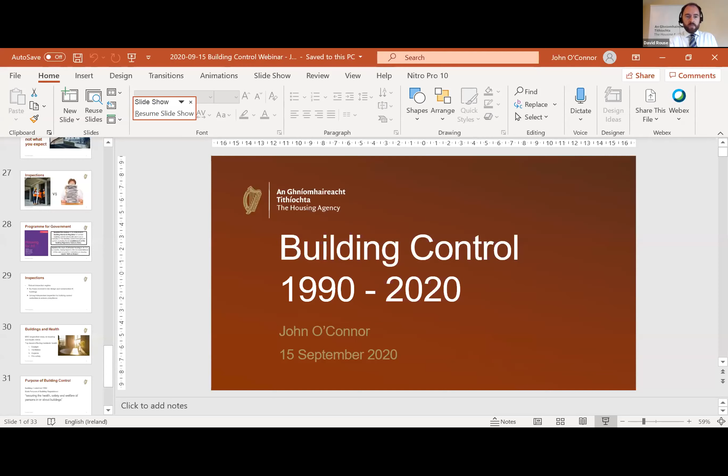Thanks very much, David, and good afternoon, everyone. I'm glad to be speaking on this topic. We're 30 years on from the Building Control Act in 1990.

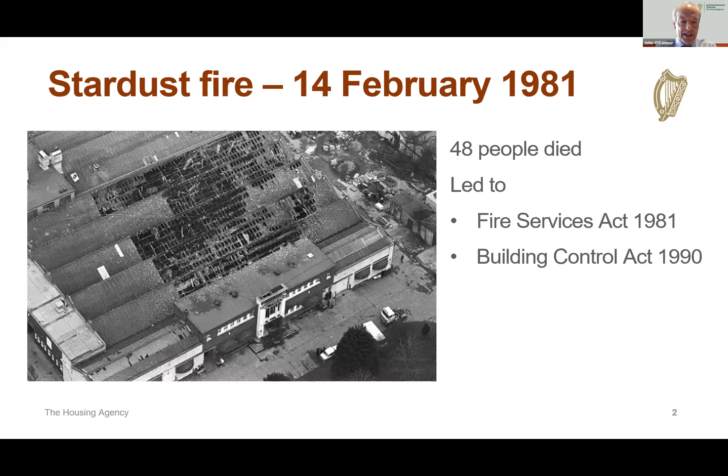Just by way of background, you'd all be familiar with the tragic Stardust fire on the 14th of February 1981, Valentine's Day. Tragically, 48 people died in that fire, and that led to the Fire Services Act in 1981, and then on to the Building Control Act in 1990.

The Building Control Act in 1990 — the minister at the time who brought it in was Pádraig Flynn from Mayo, and it was also the year of Italia 90. I gave my first public lecture on the Building Control Act on the 14th of June 1990, in the middle of Italia 90, and surprisingly 300 people turned up at the time, but it was an important area in terms of the introduction of a different form of building control in the country.

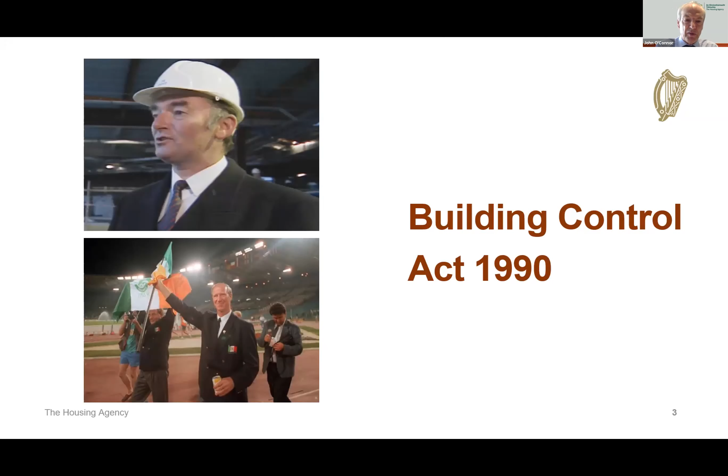A number of issues in relation to the Act in 1990 that I think we should all be reminded of: firstly, the legislation is enabling legislation, and it's under the Building Control Act that building control regulations and building regulations are made. But there's a number of very specific items in the Act that are important.

One, in terms of the responsibility for compliance, rests with building owners, builders and designers. Section 3.5 in particular states every building to which building regulations apply shall be designed and constructed in accordance with the provisions of such regulations. So it's very important that we're all aware of that.

The Act also gives powers of inspection, by authorised persons. These would be authorised by the building control authorities — the local authorities — or the minister, to carry out inspections or to request information. That's Section 11 of the Act. And offences and penalties are covered in the Act, Sections 16 and 17.

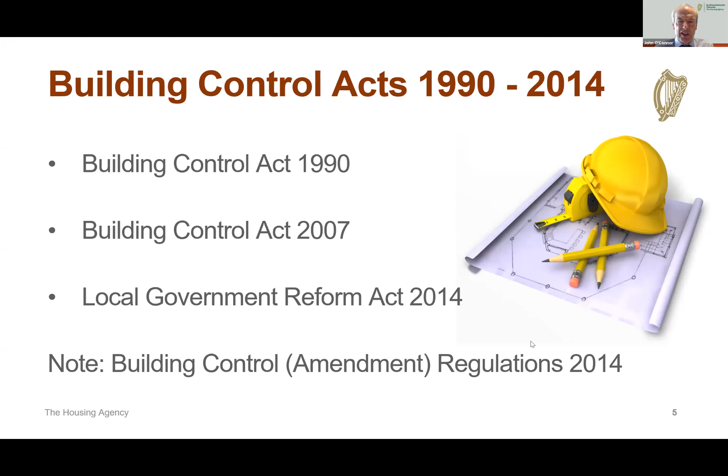The Building Control Act of 1990 is still very much the most important piece of legislation from building control's perspective. There was a significant act in 2007 that made some changes to the Primary Act, and it introduced provision for disability access certificates. Then there was an act in 2014 that made some further amendments. But one of the biggest changes since 1990 happened in 2014 with the Building Control Amendment regulations, which brought in significant additional requirements in relation to the building control system.

And then there's two very important sets of regulations: the building regulations and the building control regulations. It's important to note that the system could operate purely with the Building Control Act and the building regulations. But the building control regulations bring additional measures to ensure compliance.

The building regulations set out the technical requirements for compliance with any building work. It's very important for anyone involved in building control to be aware of the regulations and what applies depending on the type of work being carried out. Underneath the building regulations, we have the technical guidance documents, which provide guidance in relation to compliance with the building regulations, and they vary from Part A, structure, down to Part M, access. So it's very important to realize that the building regulations are the primary document.

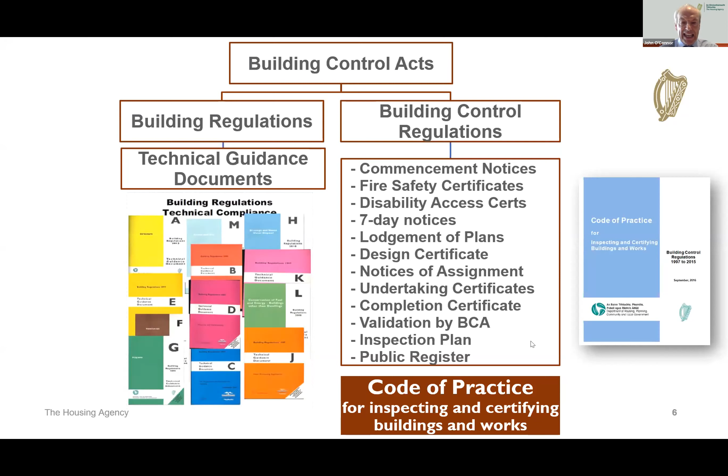There was also a statutory code of practice for inspecting and certifying of buildings and works. I was involved in the drafting of that code, along with a representative group from the industry and the department, in relation to the certification system that was included in the amended building control regulations at that time.

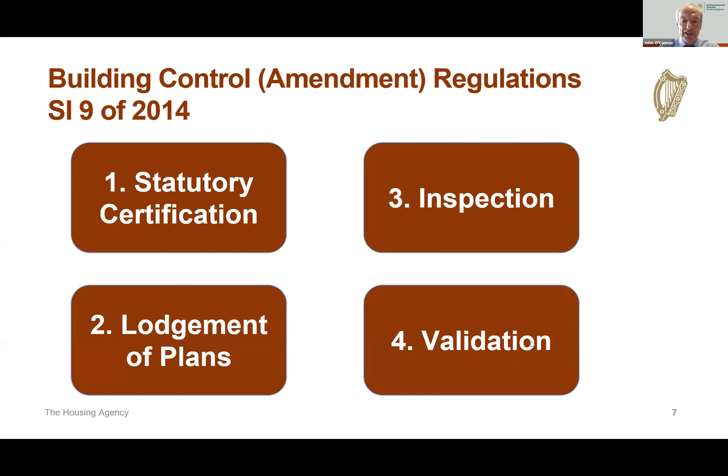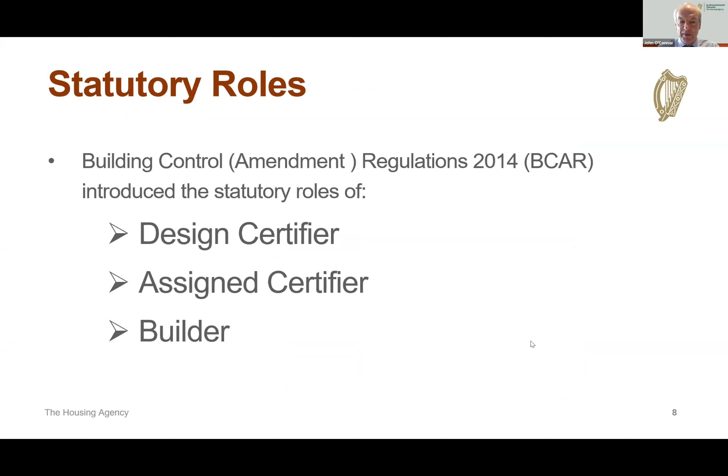The Building Control Amendment Regulations of 2014, known as BCAR, introduced four additional specific measures: statutory certification was introduced, the lodgement of plans was introduced, an inspection regime for during construction, and a validation process for building control authorities at commencement and completion stage.

Also, statutory roles were introduced: the design certifier, the assigned certifier, and the builder. I'm not going to go through all the details, but there are certain obligations on the building owners, and they're set out there, and these slides will be shared with you.

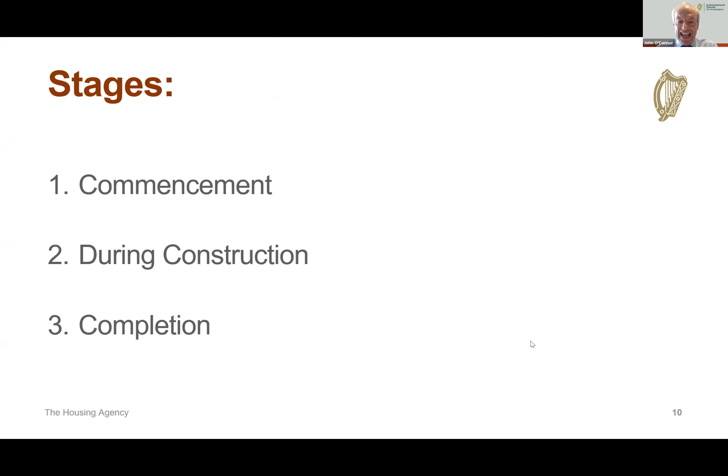In terms of building control, maybe there are three stages that are particularly important: commencement, during construction, and completion stage. So if we look at the commencement stage, first of all...

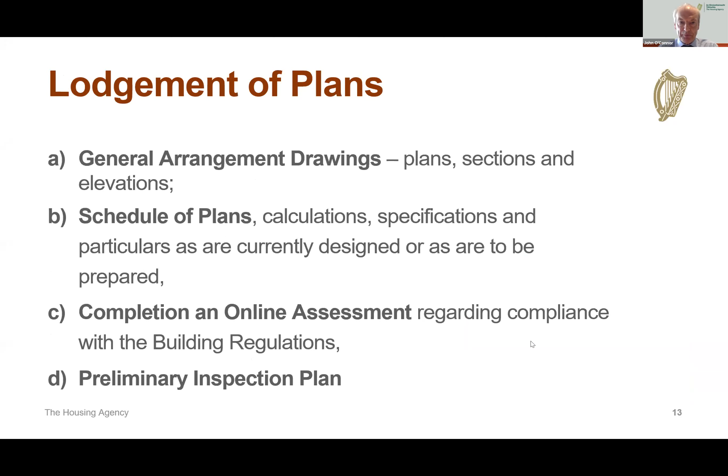The commencement notice has always had to be lodged, but there are now additional requirements in relation to the commencement notice that is submitted. There is now a requirement, since 2014, to lodge plans with the commencement notice, and to lodge a preliminary inspection plan with that commencement notice. There is a requirement to lodge a design certificate with the commencement notice.

Now, Richard will be talking later. All of this lodgement is lodged with the Building Control Management System, a national system that Richard will speak about.

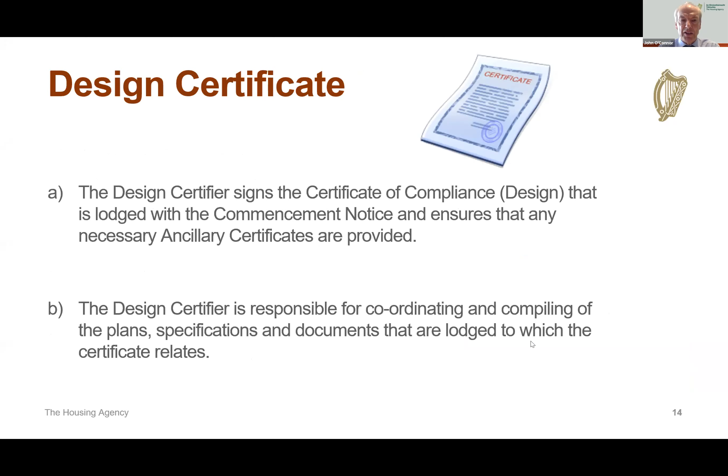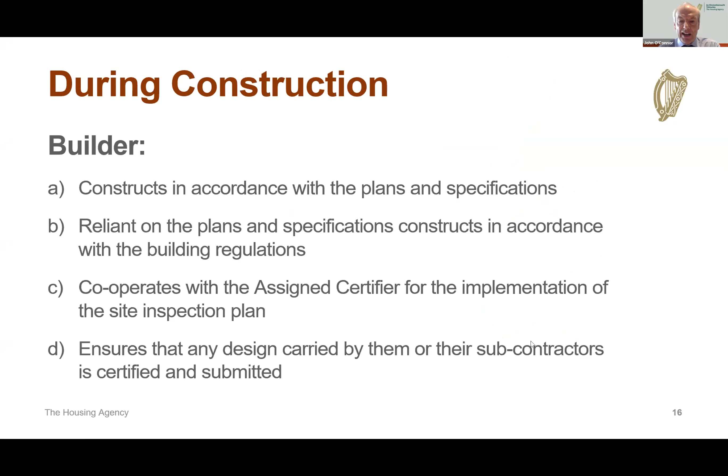Then there's the construction stage. At the construction stage, there are requirements on the builder to construct in accordance with the plans and specifications, and generally in accordance with the building regulations. There are requirements on the assigned certifier, who prepares and implements the inspection plan and coordinates what's happening during construction.

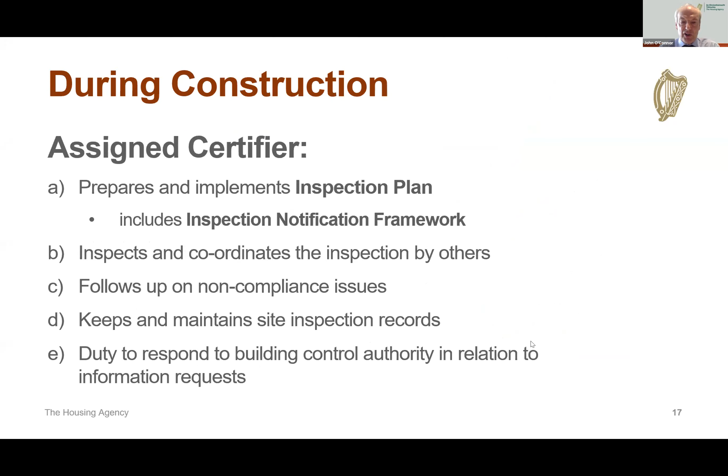Inspection is a critical element of the 2014 amended regulations. The assigned certifier and others carry out inspections, there's an inspection plan, and there's a record of those inspections.

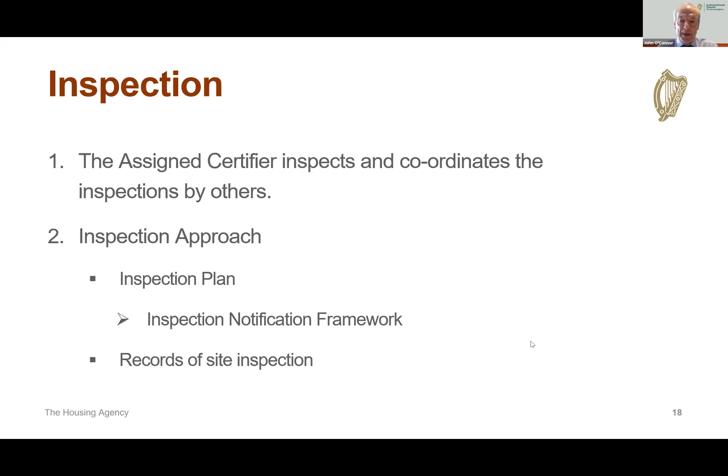Then we move on to completion stage. At completion stage, again, there are documents that have to be submitted, online to the Building Control Management System: a certificate of compliance and completion, plans, and if there are changes to the plans, and the inspection plan that was implemented.

There's a completion certificate. This is the most important certificate required in the building control system, signed by the builder and by the assigned certifier, and supported by ancillary certificates.

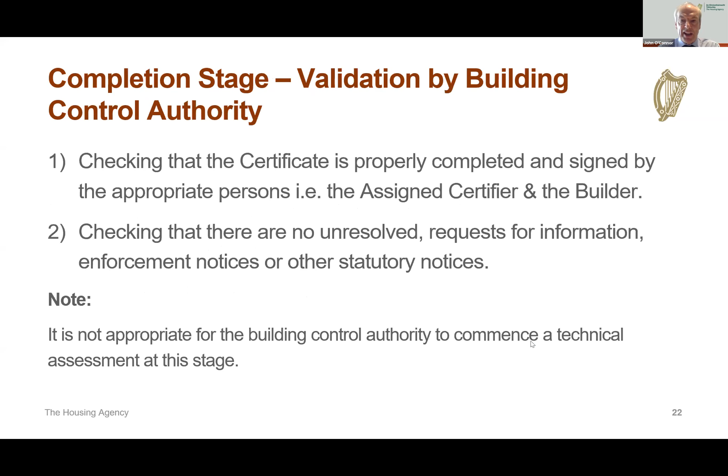Also at the completion stage, there's a validation process by the Building Control Authority to ensure everything is in order. There are timeframes and methods in terms of dealing with the validation process. Very importantly, the certificate must be submitted, validated, and placed in a register before the building can be used.

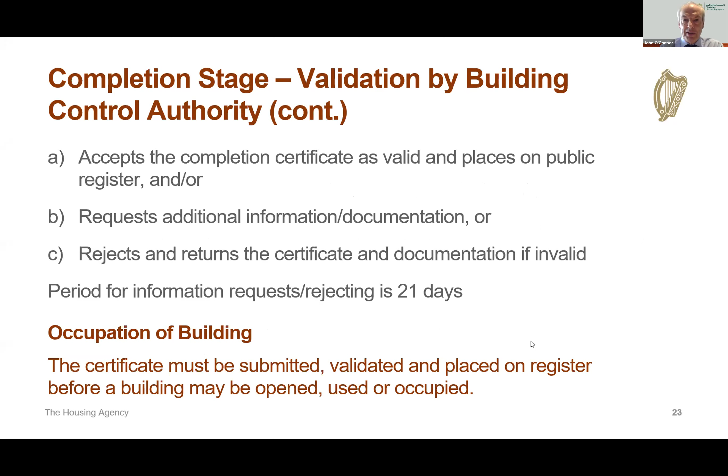In terms of building control and building regulations, it's often the result of tragedies such as Stardust or significant problems. This is Priory Hall, a lot of construction issues and non-compliance with building regulations involved.

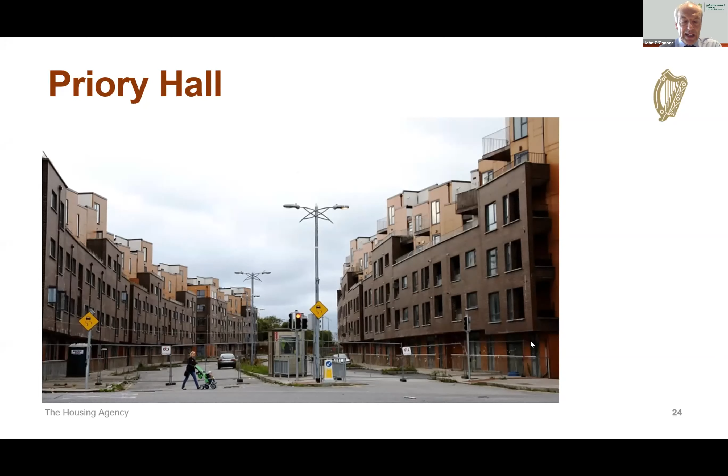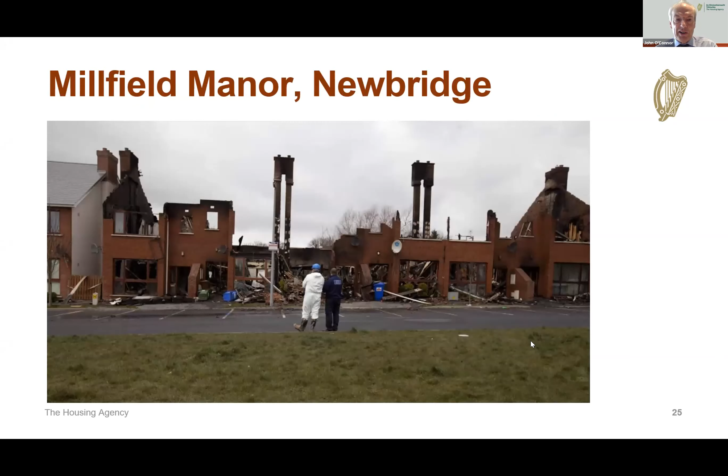And we've had a lot of issues, particularly with multi-unit developments and the defects in them. Even with houses, here's one in Newbridge in Kildare, where a terrace of houses burnt down as a result of a fire starting in one house and then lack of fire stopping at roof level, and fire spread.

A couple of things I want to talk about in particular is the importance of inspection. This is a phrase I always like, and it applies across the board to lots of different areas: you get what you inspect, not what you expect. So inspection is critically important.

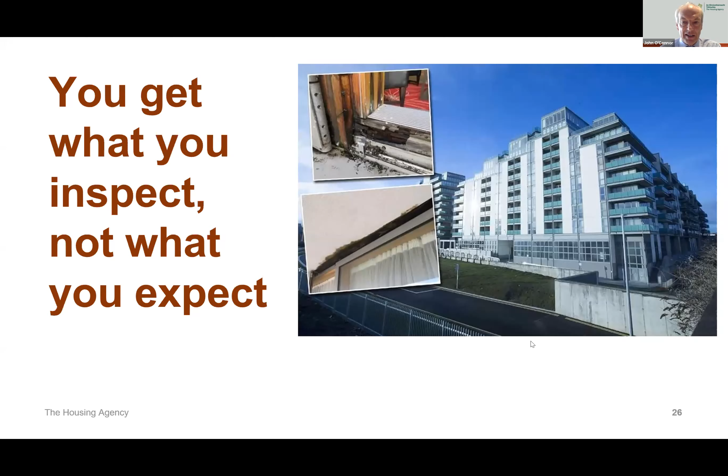I was involved with the industry and with the department in relation to the regulations, and the code of practice came out in 2014. A major part of it is to do with inspecting building works and ensuring that works are built correctly in the first instance.

One particular concern I have, both on the design and assigned certifier side and builder side, and also maybe within building control authorities, is we can get very caught up in paperwork and bureaucracy and making sure all the forms are filled out and everything is in place. But inspection is critically important.

So I just ask all of you to think about how much time you spend on the inspecting side as opposed to the paperwork side. The balance has to be, and should be, on the inspection side - there can be just too much focus on the paperwork.

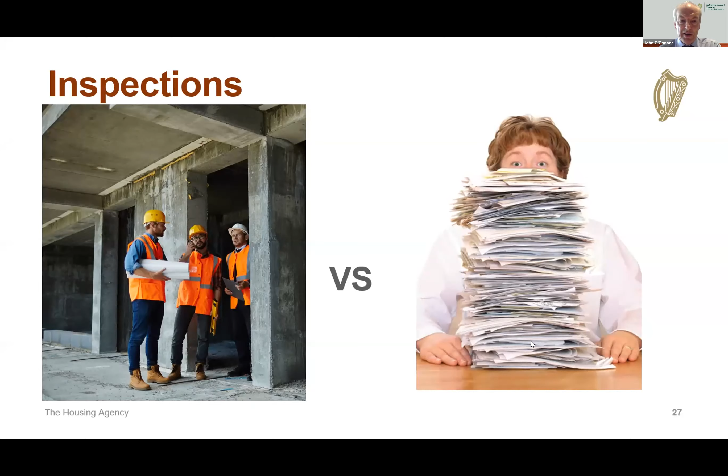In the Programme for Government, there's a lot of attention on the building control system and the issues in terms of defective housing in particular. In relation to building control, there's talk about having a building standards regulator in place, and the re-establishment of the Building Regulations Advisory Body, which is provided for in the 1990 Act, and also then to address issues in relation to defective housing, as were brought up in the Safe as Houses report from the Joint Oireachtas Committee on Housing.

I just want to give my own view on where we need to improve the system, and it goes back to the whole area of inspection. Those involved in design and construction need robust inspection systems. Building control authorities, who provide that independent inspection regime, should strengthen that further. I'd advocate strongly for building control authorities coming together regionally or nationally to put in inspectorate teams focused on specific areas such as residential buildings, houses and apartments, with boots on the ground doing inspections to ensure a high level of compliance. So inspection would be high on my agenda for any changes to the system.

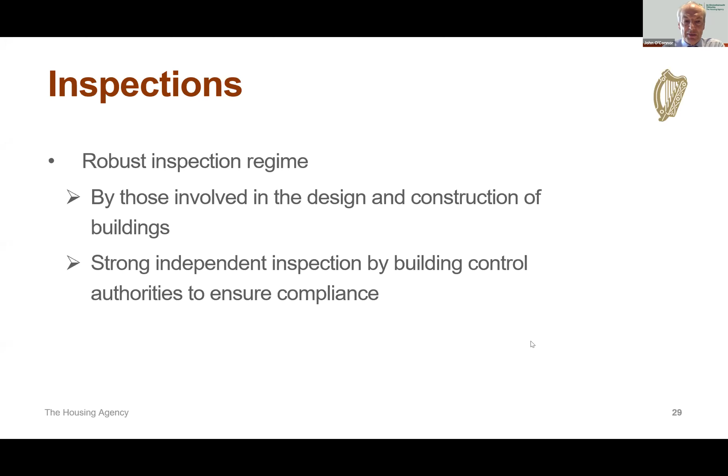I just want to bring it back to two remaining slides, buildings and health. The BRE, the Building Research Establishment, carried out a longitudinal study on housing and health that finished in the 1980s. This looked at houses and apartments over a long period of time, tracking occupants in terms of serious illness and death or fatalities. The top issues affecting health - serious health issues or death - daylight was the most important one they found, followed by ventilation, then hygiene and fire safety. There were others as well, but these were the top four. You might be surprised to see that fire safety came in at number four.

Daylighting was found to be so important because poor daylighting caused serious mental illness or additional mental illness, and the level of suicide in properties with poor daylighting was higher than in ones with better daylighting. It's one area where there are no requirements in the building regulations regarding daylighting, however it's normally covered through the planning system.

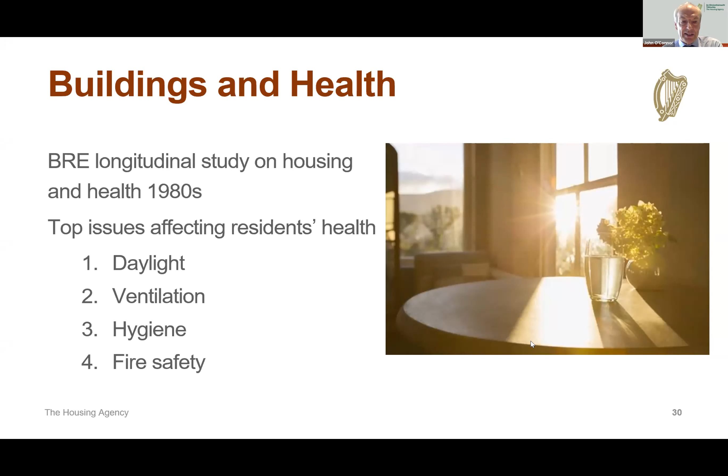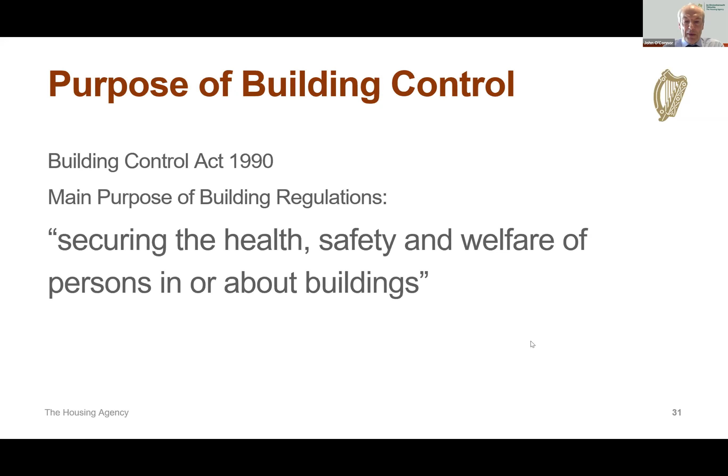Going back to the 1990 Act, the main purpose of building regulations - there are other purposes - but the main purpose is securing the health, safety and welfare of persons in or about buildings. I think we should all just remember that. It's about health, safety and welfare of people in buildings, and that's the whole purpose of building regulation, the primary purpose. There are other purposes such as energy conservation and other matters, but health and safety are the primary matters. So that's a very quick run through from 1990 up to today. I'll hand you back to David.

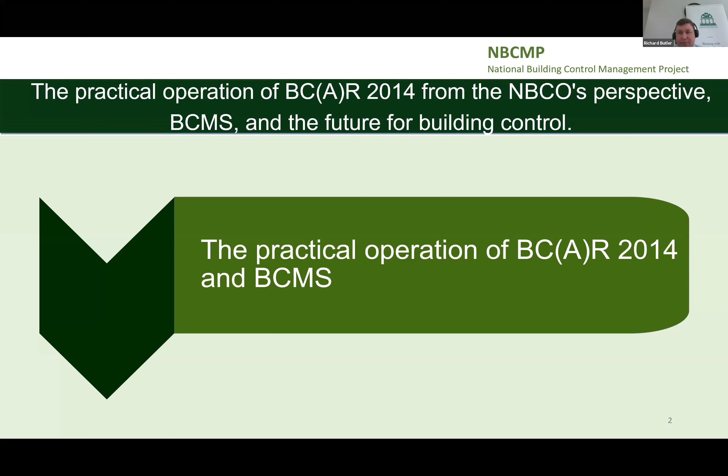The practical operations of BCAR 2014 from the NBCO's perspective and the BCMS. The object of the National Building Control Management Project is to promote a culture of compliance with the building regulations through reforming and strengthening the building control system and inspection regime, developing and implementing standardized approaches and common protocols, and better supporting and further developing the BCMS system.

The National Building Control Management Project provides strategic oversight, support and direction for the development, standardization and implementation of building control as an effective shared service in the 31 building control authorities. We implement BCAR 2014 through our 4 pillars: training, compliance and support, building control management system (BCMS), and inspections.

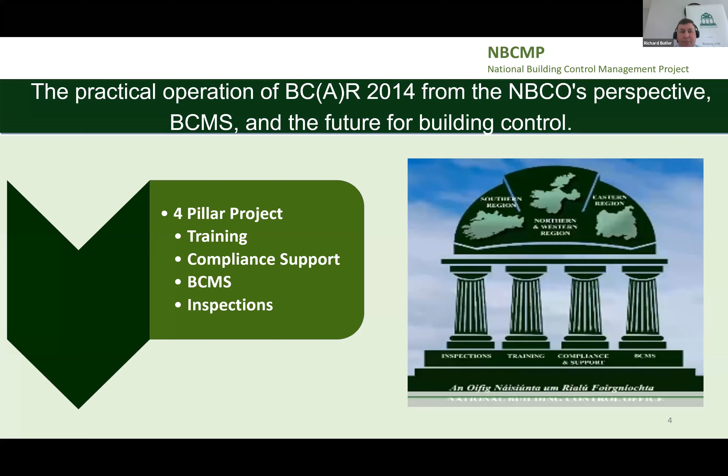The 31 building control authorities are divided into 3 regions: Eastern and Midland region, Northern and Western region, and Southern region. The NBCO and the Department of Housing, Local Government and Heritage meet regularly. This has become an effective way of agreeing and implementing standardizing processes, systems and structures in building control authorities.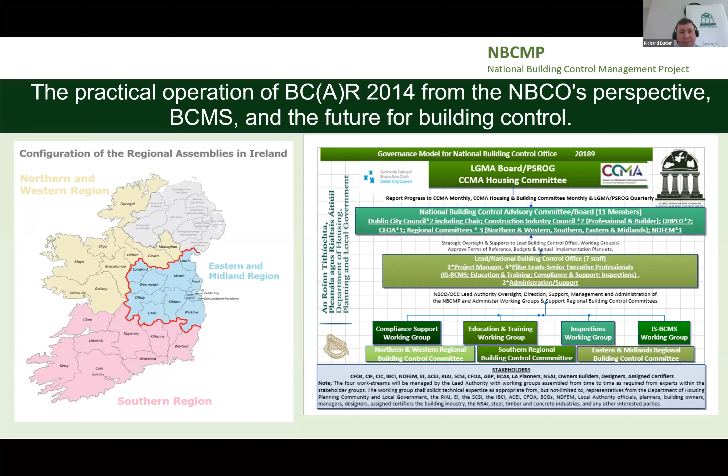Pillar 1, training. The National Building Control Office, in association with Institute of Technology Carlow, runs a certificate in building control management course, recognised as the minimum standard in building control. The first cohort of students has completed the course, and the course will recommence in October 2020. It will be delivered using IT Carlow's virtual learning environment due to COVID-19 restrictions.

Pillar 2, compliance support. The compliance support pillar of the NBCO provides information, advice, oversight, and other support to building control staff and the public in relation to the area of building control. The NBCO provides guidance documents, good practice guidelines, and publishes a quarterly newsletter. We also make YouTube help videos, all of which can be found on localgov.ie webpage. You can follow us on Twitter at NBCO Ireland for updates.

A framework document for building control authorities was produced to standardise work practices, systems, procedures and decision-making in relation to oversight of building control activities across all building control authorities. The framework document outlines the role of building control authorities. It is available to download on the localgov.ie webpage.

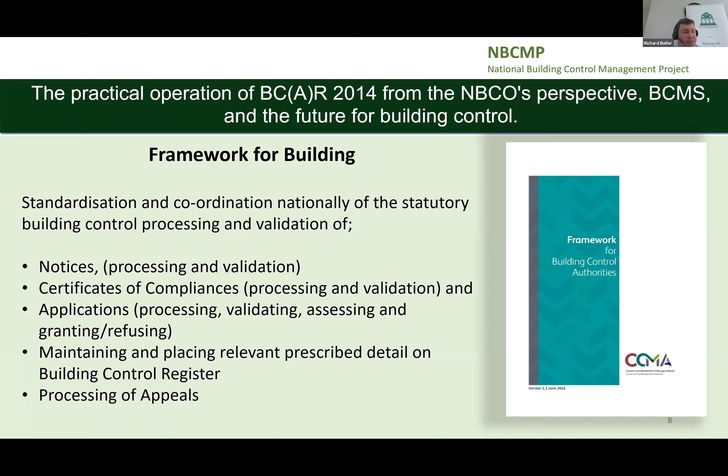The BCMS system allows for the following online submissions: commencement notice types, certificates of compliance for completed buildings or works, and since July of this year, online submission of fire safety certs, disability access certs, certificates, relaxations. We now have a full suite of building control notices on the BCMS system.

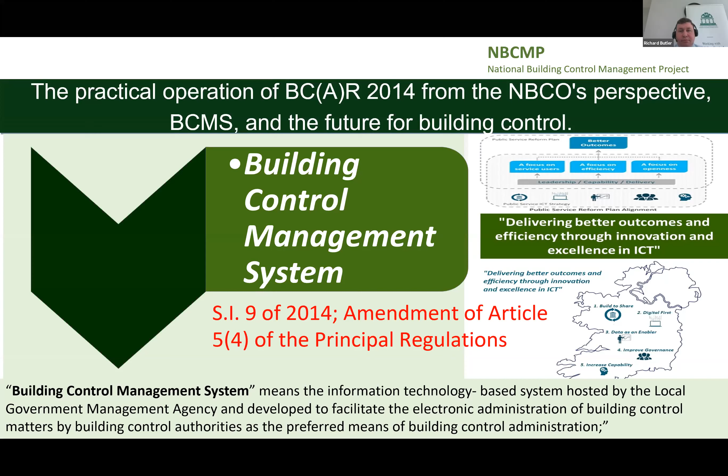Statutory Building Control Register. The BCMS also provides a building control register of notices and certificates of compliance on completion in accordance with Data Protection Act 1988 and 2003. The register contains information such as commencement notice numbers, locations, project descriptions, etc. The register allows for online search by the public. In order to download or print a copy of an individual notice, users need to be logged into the BCMS system.

Pillar 4, inspections. The 31 building control authorities are designated as building control authorities under the Building Control Acts 1990 to 2014 as amended. Building control authorities have strong powers in inspection and enforcement under the Act. Section 8 provides for enforcement, section 11 appointment of building control officers and power of inspections for compliance with regulations.

The NBCO has designed an inspection performance framework to help building control authorities continue to improve their work in promoting a culture of compliance with building regulations. Information on inspections and enforcement activities is provided by the Building Control Authority, which informs results of assessments made through the framework.

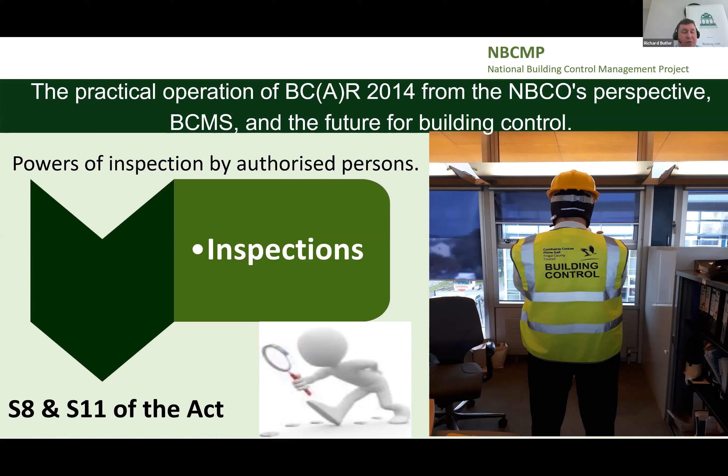Building control authorities and authorised officers' duties include enforcing compliance with building control regulations and building regulations, scrutinising building proposals, validating notices, certificates and applications, assessing and granting applications, inspecting work or buildings and requesting compliance information, serving enforcement notices, legal proceedings for breach of regulations, and maintaining the statutory public building register. Building control authorities also have a function under the Construction Products Regulations and the European Union Energy Performance of Buildings Directive.

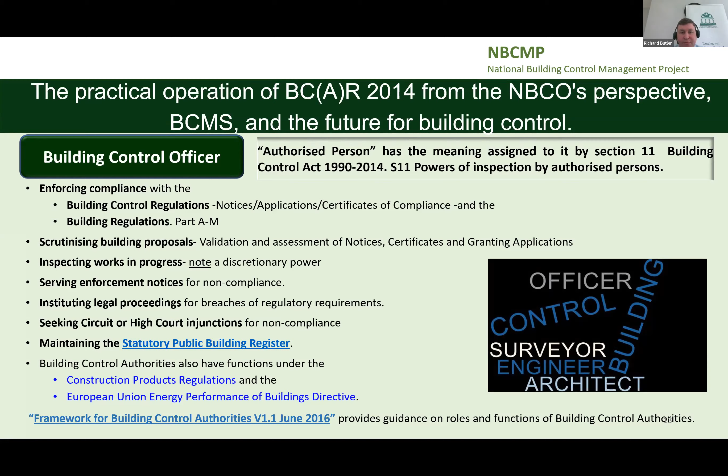Regulatory oversight is necessary to ensure that any failure of regulation among the agencies involved, be they the homeowner, the designer, builders, etc., is detected and remediated in an effective and timely manner. The aim is that the power of enforcement and prosecution will become a more credible threat to those who are non-compliant. The overall objective of the building control system is to achieve quality and safety in and around buildings.

This is done by empowering professionals in design and construction activity. Owners, builders and construction professionals need to comply with statutory obligations under the Building Control Acts.

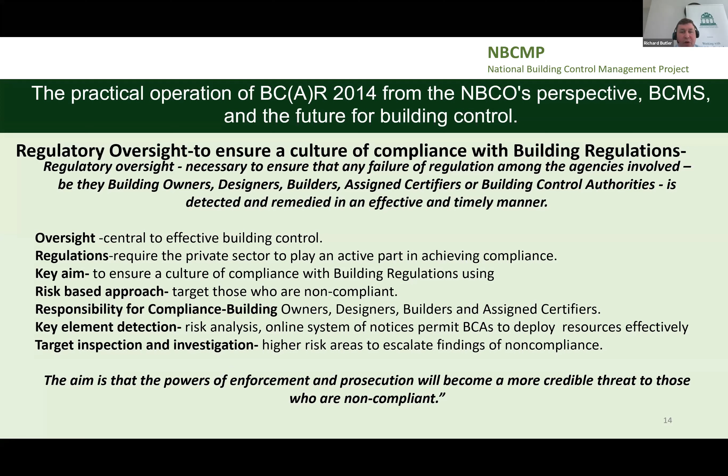The NBCO is committed to the future of building control by continuing to promote a culture of compliance with the building regulations through a reform and strengthening of the building control system and a strengthened inspection regime in accordance with the programme for government. We will do this through our existing 4 pillars and our new proposed 5th pillar, market surveillance.

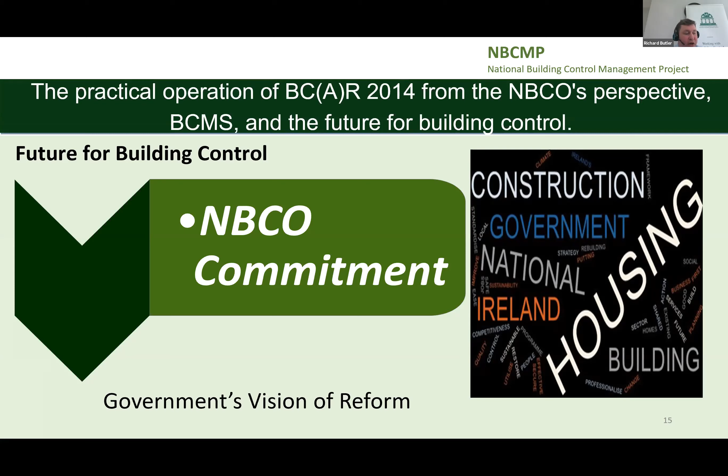The future of training. In the constantly changing environment of building regulations, with Part L being the most requested area of training in 2020, the NBCO will further develop the training pillar with guidance from the training working group and in collaboration with third level institutes, local authority regional training centres, and other relevant stakeholders. We strive to build training capacity in a number of areas and increase the competencies of building control officers in the sector. The first round of the certificate in building control management has just been completed, with 111 individuals now accredited by IT Carlow. By making this course the minimum requirement for building control officers, it elevates the role of building control officers to a more professional level.

We are also in the progress of progressing an MSc in building regulatory compliance in association with Waterford IT, which will allow for specific ideas or topics to be researched in depth.

As well as this, the NBCO issued an annual CPD building control training list, which is an annual list of approved short building control courses. This list is reviewed and updated annually. The NBCO are currently engaged with professional bodies such as Engineers Ireland, the Royal Institute of Architects Ireland, and the Society of Chartered Surveyors Ireland to provide CPD training related to building control, such as our recent webinar on SI 243 of 2012. Cross-sector collaboration allows the NBCO to reach a wider audience and get feedback from all parties involved in the process.

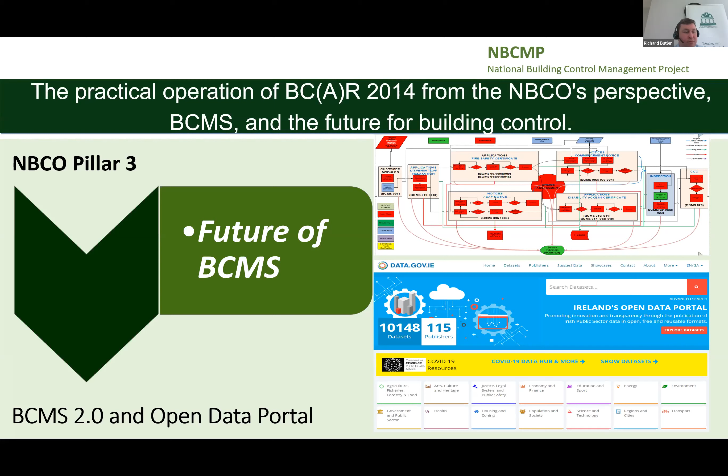The future of inspections. I am leading the inspections pillar in the NBCO to strengthen and standardise the inspection regime in the 31 local authorities. Inspections are one of the most important ways of enforcing regulation and ensuring regulatory compliance. NBCO staff are assisting with building control inspections, standardising inspection data collection through the use of inspection apps. How regulations are implemented and enforced are critical determinants of whether a regulatory system is working as intended.

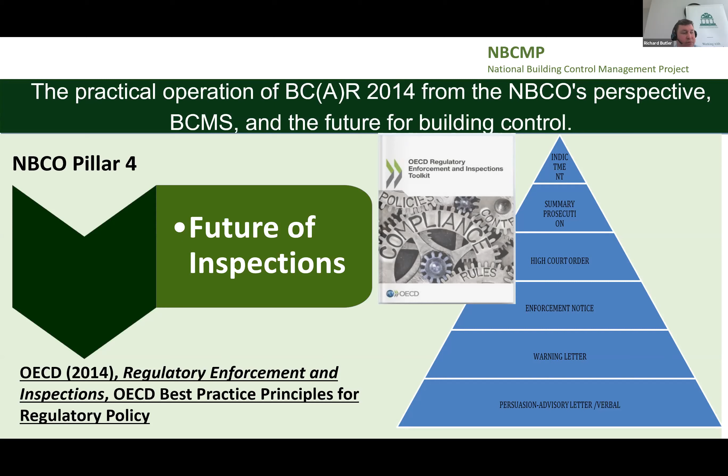Our new pillar 5, market surveillance. Building control authorities are designated market surveillance authorities for construction products that fall within the scope of the Construction Products Regulations 2013. With a no-deal Brexit back in the headlines, we need to ensure that our industry is Brexit ready. There was a BCMS alert issued lately with very useful information and links to documents. It is proposed to set up a national market surveillance unit within the National Building Control Office to ensure construction products placed on the market and used in construction are compliant with the required EN standard.

It is important that builders, specifiers, designers, certifiers, etc. are aware of the guidance and changes that Brexit may bring to the construction product regulations. They should ensure that CE marking, declarations of performance, and relevant product-related documents are appropriate to demonstrate and ensure compliance with the building regulations.